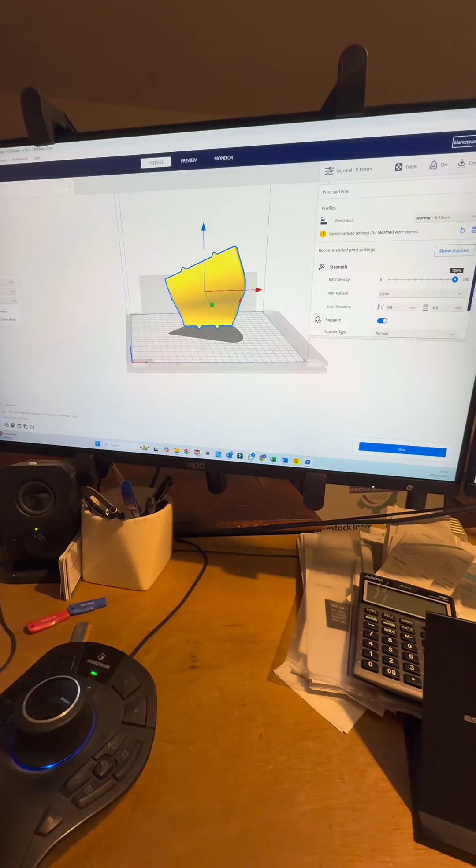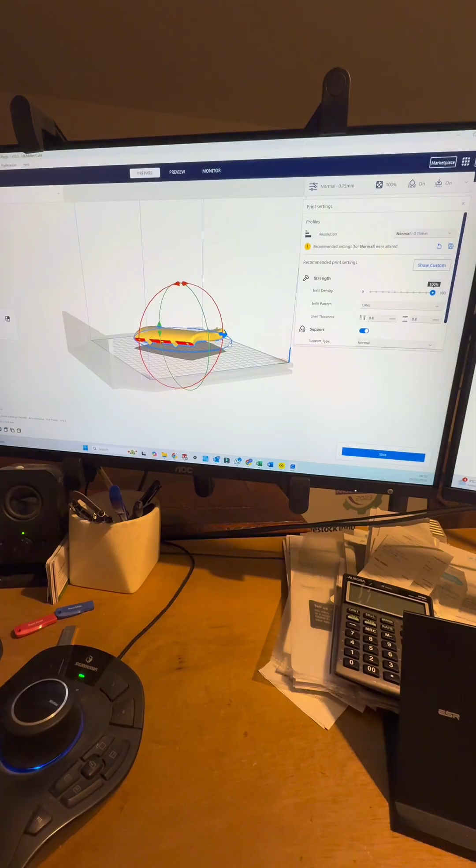After yesterday's disaster with the 3D printer, I'm going to have a go at printing a completely different part and actually a completely different material. So I'm just setting it away, but because it's a funny shaped part and there's no flat surface, I've got to try and work out the way in which it would best sit on the build plate. I've been fiddling around with it for a bit now, and so this is what we've got.

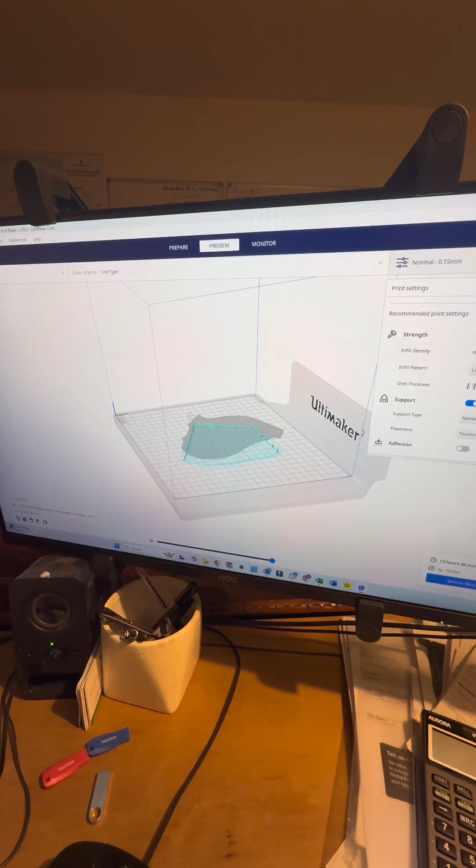So I've turned adhesion off, which is that extra bit round the outside, because it's going to have enough holding everything that's there, so I don't need that bit. And this is the quickest way of doing it with the least material. So save that, and then go and put it in the 3D printer and set it away and see what happens.

I definitely called it right yesterday, staying at home and doing my jobs at home, and then coming out and doing my riding around jobs today, because it's a cracking day, beautiful sunshine. I've just come to one of the ATMS systems, agricultural tank monitoring system. So that's it there. It's a radar and a solar panel, and the radar's reading the level in the tank. And I've just got to alter one of the settings on the radar. We set two up slightly differently just to see what worked best, and so we're just altering one to match the other one.

The radar's got Bluetooth on it, so I can Bluetooth to the radar, and that's how I alter the settings. And the other problem is, for some reason, there's two not far from each other, and this one seems to be getting a lot of water in it, and I don't really know why. So we're just going to open it up and see what we can do to sort that out. I don't understand why one's getting water in and one isn't. But anyway, I also need to measure this box, because I need to get two more of these for two more that are to go in.

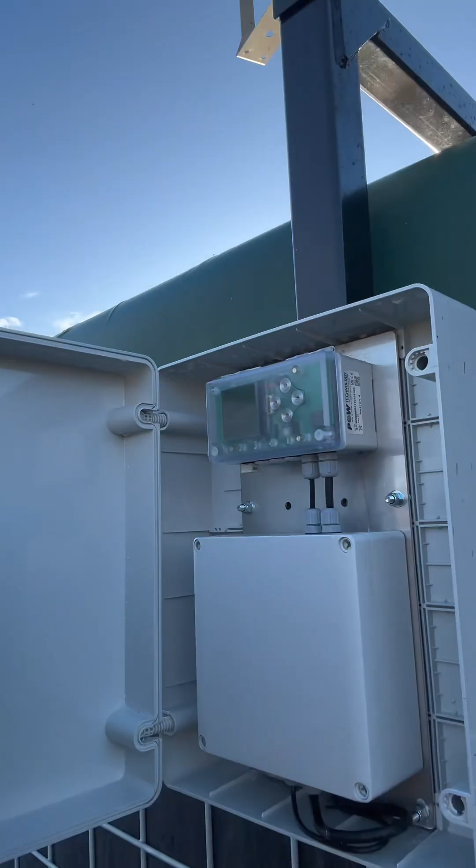Oh, it's nowhere near as wet as it was. There's a bit of moisture in the top of it, like that. But there's nothing in the bottom. So I'm probably not going to do anything about that because it's no more or less than it was before. I think it's just condensation's got in somehow, and I'll dry it out, and we'll leave that alone. So that's the Metron. That is a battery in there that's filled up by the solar panel. I don't know if I'll be able to show you what I'm doing because I need my phone to do it, but I'll try and do a screen record and you can see what I'm altering. I'm just going to go into the Metron, wake it up.

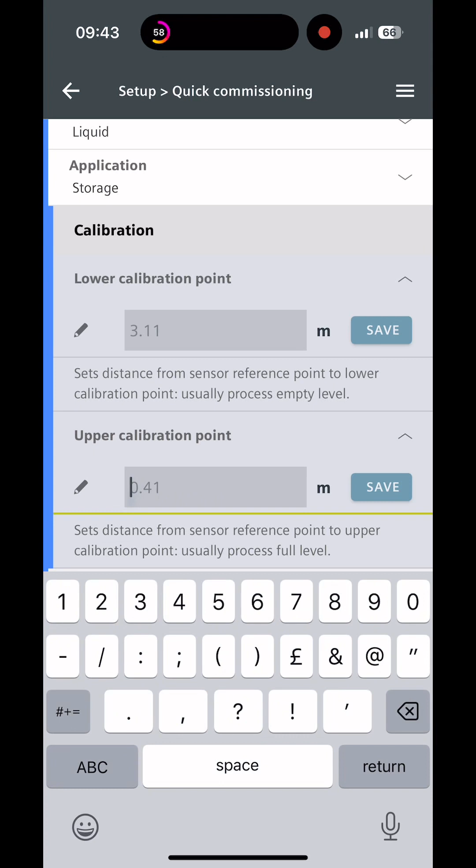The issue with the water getting in, I think, was the top edge wasn't sat in the seal right. There's a seal all the way around, and I think the time before, I must have put it on and not sealed it right. So that's just worth bearing in mind, check they're right. I probably ought to say that the ATMS system is for tanks like this that are remote located, and they are holding digestate that's come out of an AD plant. The reason they're remote located is because what's in them gets spread on farmland that surrounds them. So this is just to monitor how much there is in the tank and if it's leaking. Try and minimise any environmental disasters.

That's that done now. So I did it in December with one of the lads from POW. So I sort of knew what I was doing, and I also rang him before I came just to double check, because I knew I wouldn't remember everything. And so yeah, went to plan. So they've just got to alter the scale at their end, and then this will be matching the other one and should be dead on. So on to the next job.

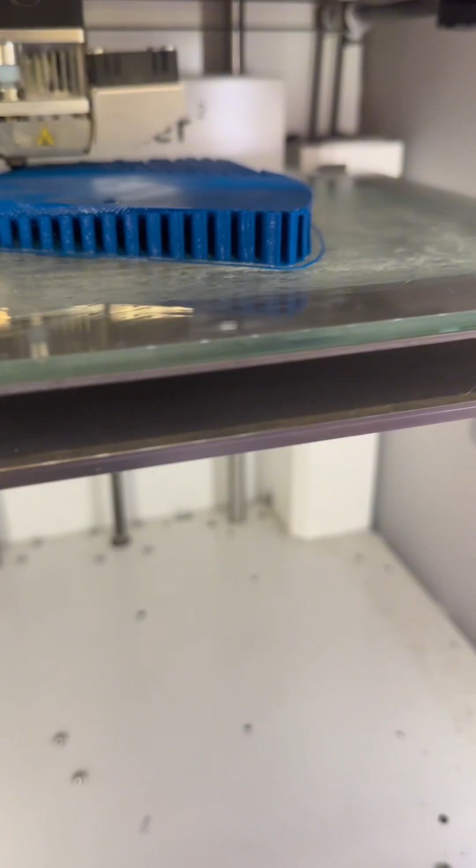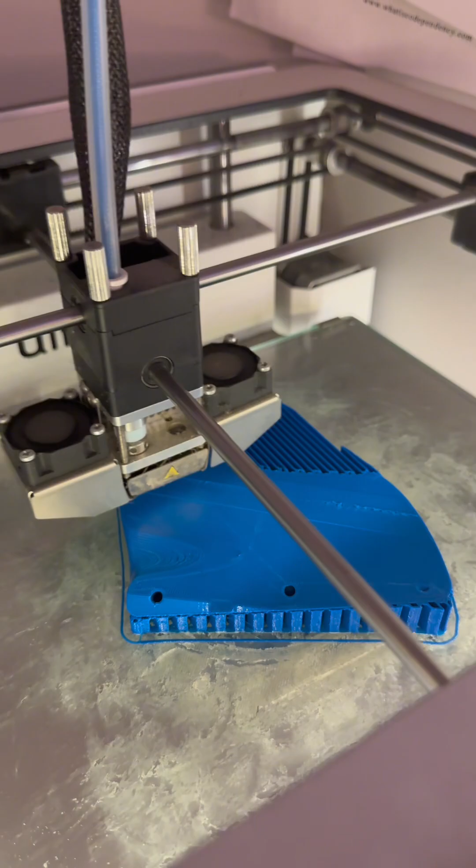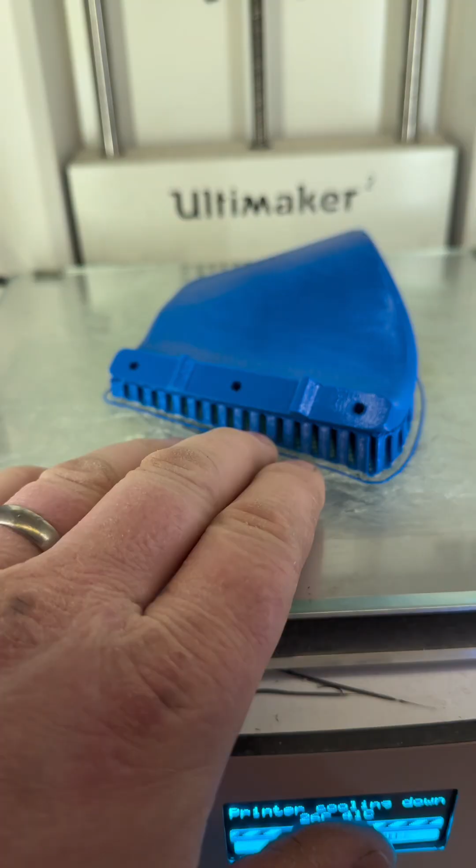I'm just back home for my lunch, so I've just come in to check on this, and it's printing away not so bad. A bit rough there. I did wonder when it was printing earlier, I saw this start to appear. I thought, oh, I've cocked it up somehow, but no, it's one of the holes that's meant to be there, so just keep working away. A bit more success today with the 3D printer, so I think it'll let go in a minute. You'll hear a crack, and it'll release it, and then we'll be able to get it off and see what it looks like.